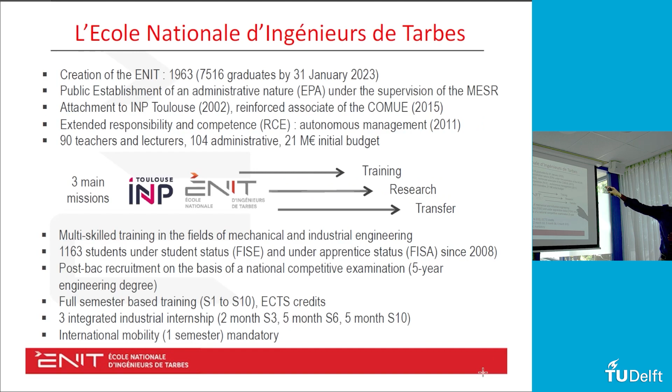And the research laboratory, as I said. The head is Bernard Archimède, who is a full professor in industrial engineering. I am the deputy director of this lab. The school was created in 1963, and the lab was created in 1989.

We have more than 130 members, with around 60 permanents. We have also around 60 PhDs, and the other staff is postdocs, technicians, engineers, and secretaries to support the research.

As I said, it's a multidisciplinary research with, I would say, half for mechanical material science and half for industrial engineering in the large sense. That means industrial engineering, computer, robotics, automation, PHM, etc. It's organized in 2 scientific departments. The first one for all things related to mechanics, and the second for all things related to systems.

In the Department of Mechanics, Material Science and Processes, you have 4 research groups, and we have 5 research groups in the Department of Systems, and we have what we call a transverse axis, which works on multidisciplinary topics in the lab.

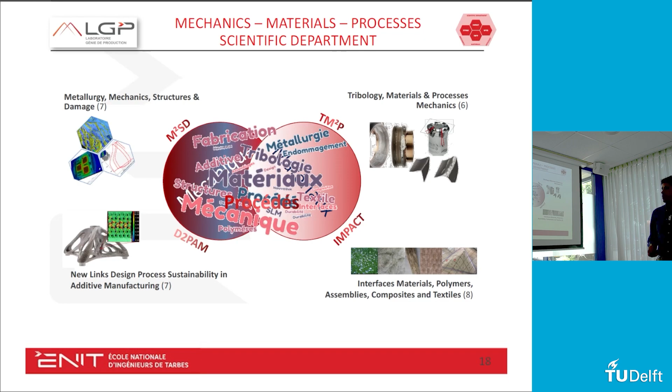We have new links, design processes, sustainability in additive manufacturing. It's mostly additive manufacturing. We have interfaces, materials, polymers, assemblies, composites, and textiles. We have tribology, material science and processes, mechanics. I don't know if you are accustomed with this, but again, if you would like to collaborate, we'll be pleased to put you in touch with our colleagues.

For the system department, we have 5 groups, as I said. We have PICS, which is planning, interoperability, and coordination of systems dynamics. We have ACE, which is efficiency of electrical energy conversion systems. We have Mavericks for automation and robotics, methodologies for the design and control of mechatronic and robotic systems for interaction.

We have another group which is ICE, Knowledge and Experience Engineering for the improvement of processes, systems and organizations. And we have the research group related to prognostics and risk safety management. The transverse axis works mainly on additive manufacturing, for all additive manufacturing processes, from material to systems. It tries to bring together colleagues from the 2 departments to work together.

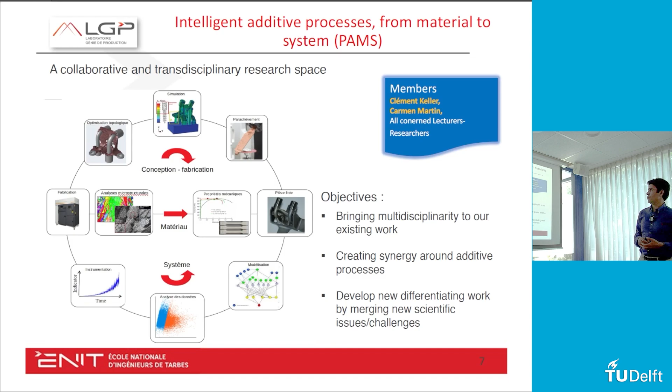These are the platforms we have for mechanical, for material, for industrial engineering, for robotics. If you are interested in the equipment we have, you can come and we can share them. Of course, we ask for some agreements before working on them. But we are really well equipped with recent equipment.

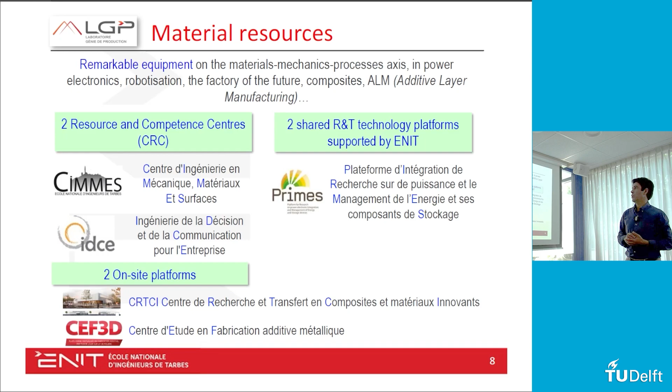So I finished just here to present you my lab, and now I will go to the presentation. Same for the presentation, I will not go to the details, but if you want to discuss, I will be pleased to do it with you. And of course, at the end of the presentation, don't hesitate to ask questions.

This is for prognostics and health management, mainly because I am working on this. But as I said, for other topics in our lab, we will be really pleased to welcome you. I will present you the workflow, some approaches, and what we have done until now in the group.

So, as you know, why we do this PHM is to try to anticipate failures, to predict failures, mainly, and then to try to optimize the maintenances. Mainly for us, it's condition-based maintenance and predictive maintenance. Okay? You have some statistics.

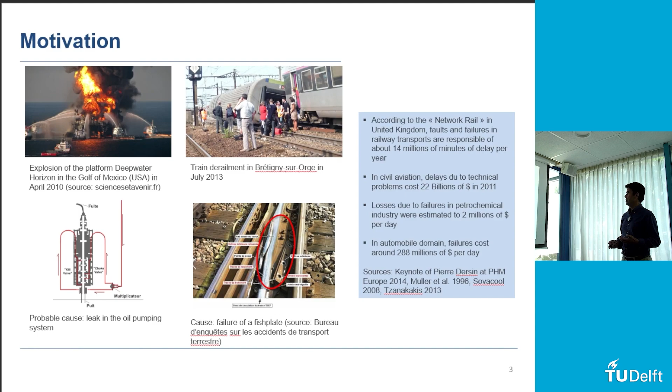I don't know if you have heard about this catastrophe, and there is a movie now from 2016, I think, something like that. And here, unfortunately, in Paris region, derailment of a train at the rush hour, and you have all statistics about the impact of degradations, failures on performances, on systems, and also costs. So we work in the group in PHM to try to anticipate these failures and try to reduce the costs.

You have many definitions of PHM. I give you here only three: one from a transfer center, one from a company, and one from pure research. If you look at these definitions, you will see that in PHM we work to use tools, methods, algorithms to monitor the system, to detect anomalies as soon as possible. This is very important. Diagnose the causes of the faults, and then predict what we call the remaining useful life. All this information, we use it to schedule optimally the maintenance actions.

The process of PHM, of course, this is just to show the main steps. But what I mean is that we don't have to work, for example, on health assessment to go to the decision. We can, from health assessment, go directly to decision. Okay? We don't necessarily work all these steps sequentially. From data processing, we can go to anomaly detection or decision, etc. But the main steps are here.

We have a system here. You can replace this by your aircraft, and then we should first have representative data. Representative data means not only healthy data, but healthy and faulty data. This is very important. And then we pre-process this data.

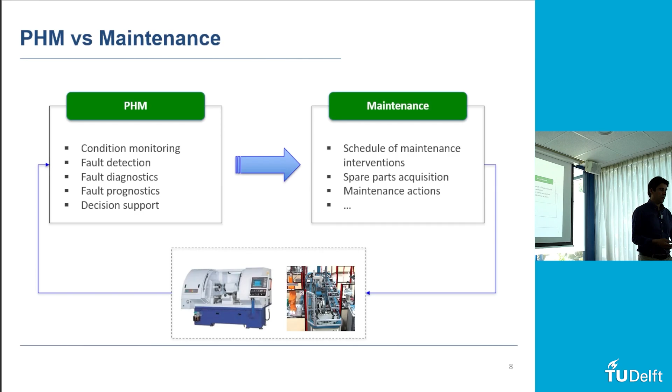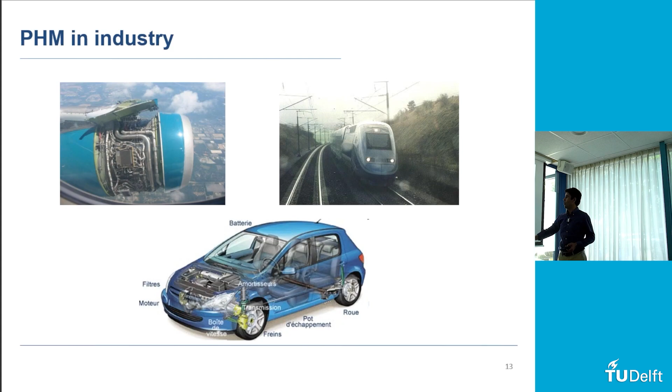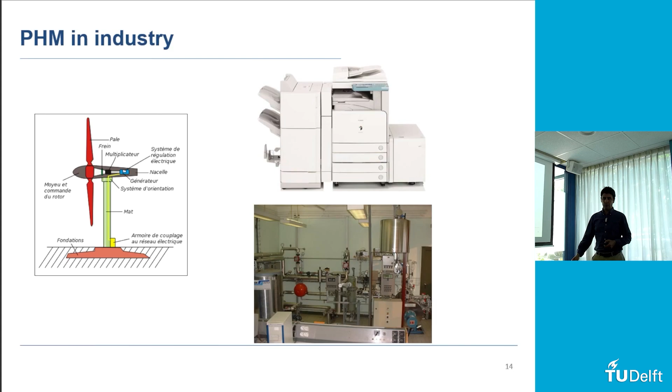The application of PHM, you know, you find it in aerospace, you find it in railway, automotive, you find it in wind turbines, in all equipment for printers, etc. You find it in manufacturing processes, and so on. Okay. This is, of course, not exhaustive. We don't have all companies here. Just to mention that for aerospace you have the main companies, the energy also, railway, etc. So

I didn't put KLM, sorry, but they are inside, of course. Okay, they are not looking, so you have to cut it after. Sorry, I'm laughing. Okay, it's not complete, of course. Huh?

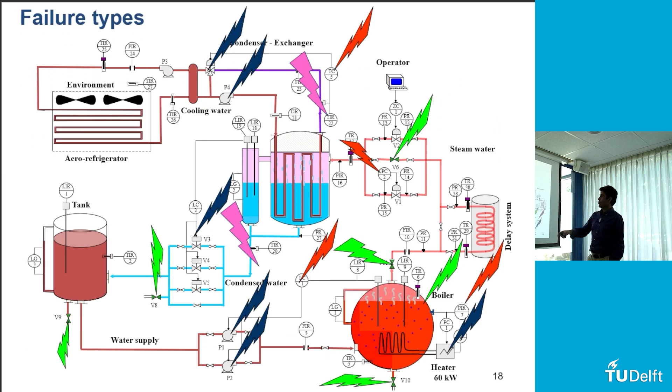Here, just to show you the main failure types we have on a system. When you have a system, we have what we call physical failures. That means leakages, blockages, etc. on a system. You may have what we call also controller failures. They are control algorithms, okay, the controllers. You may have also actuators. You may have, at the end, sensors.

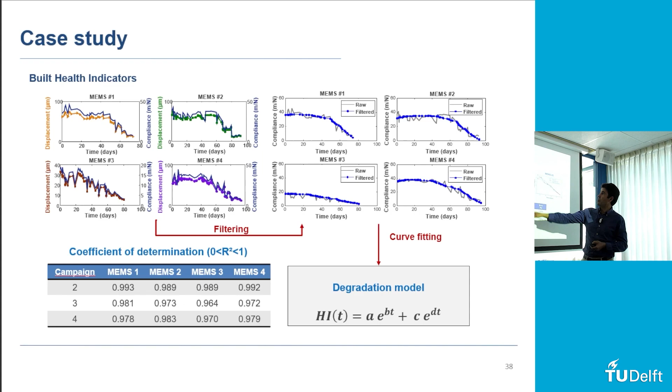We can calculate at each time the health indicator value. And then, because we have a threshold, we can estimate the remaining useful life of each MEMS. Of course, when you see here this blue line, we know it after each degradation. Because we are in a lab, for each MEMS we know. But when we predict, we don't put it. So we give only the data to the PhDs. They don't know this true value of RUL. They have only the data. And then they try to predict, you see, look at the predictions. They are quite good predictions.

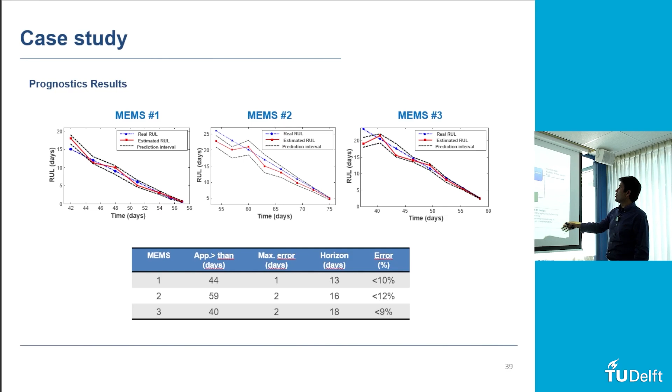And then all this we use, of course, to take decisions. We work in our group also, I didn't mention this, on how to use this information to make decisions. It's mainly optimization problems. And the decisions can be of two types. Operational, that means how to make maintenance interventions, how to change perhaps the set point, the control. We can work also on what we call fault tolerant control. I don't know if you have heard about this.

In aerospace, in aircraft, it's well used because the aircraft should be tolerant to faults. When you have a failure, they should continue operating. When you have one engine which is out of service, they continue with one. Okay, they are called fault tolerant systems. Control in the sense that when you have a fault, you try to manage the control to continue working even with the fault.

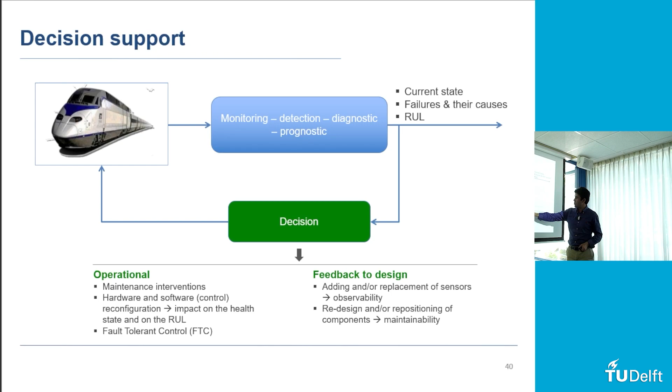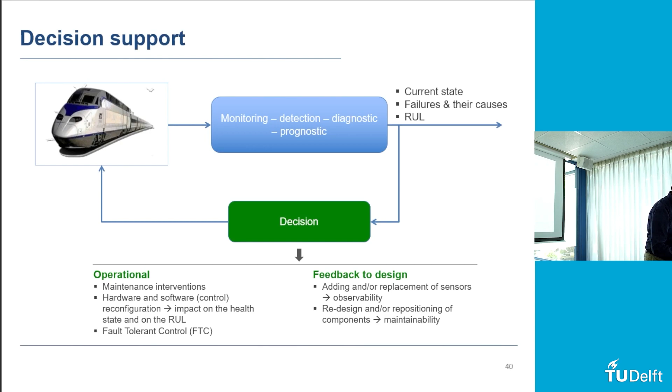Also the decision can be the feedback to the design. That means we should, for example, add sensors, try to place the sensors other ways because they don't detect correctly. We can also redesign the components so that they can be easy to maintain, what we call maintainability. We take less time to maintain, etc. We work on this. Okay? I can take 5 minutes to...

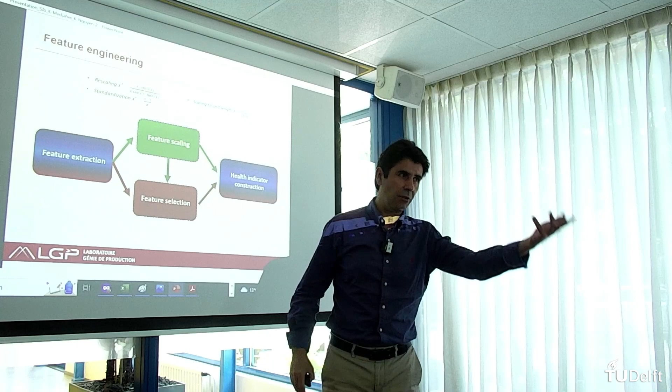Yeah. So here I will quickly speak about some steps, feature engineering, anomaly detection and diagnostics, and prognostics. Just some results. You have our papers, and of course we can continue by exchanging emails. You have, I guess, worked on this. When you have raw signals, after pre-processing, after all this preparation of data, we extract features. We can scale the features, we can select the features, we can build health indicators. They are for us different steps.

In the feature extraction domain, you have mainly three types of features: time domain features, frequency features, and time-frequency features. I don't know if you have worked on this. And you have, of course, each one for each specification, each application. If you'd like to go further, you can look at this paper. It's, of course, free. You can download it. Here, our first contribution on feature selection. We worked on it with Alstom.

Okay, there are some confidential issues I will not speak about in detail. Quickly speaking, we have a system for a train, TGV, and then we have some sensors, okay, temperature, vibration, and so on. And these are raw signals. Then we worked on a method based on a genetic algorithm to select the best features among the extracted ones. The best features only for detection and diagnostics, not for prognostics.

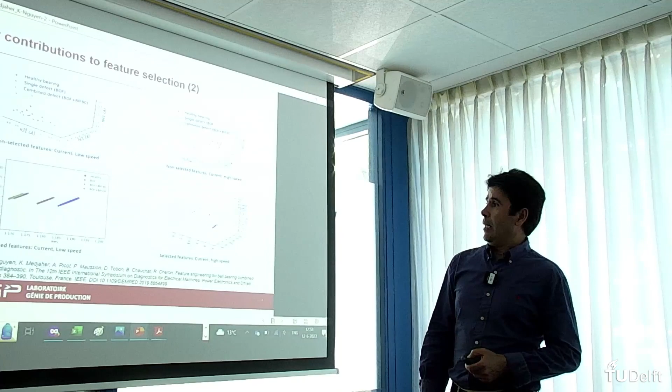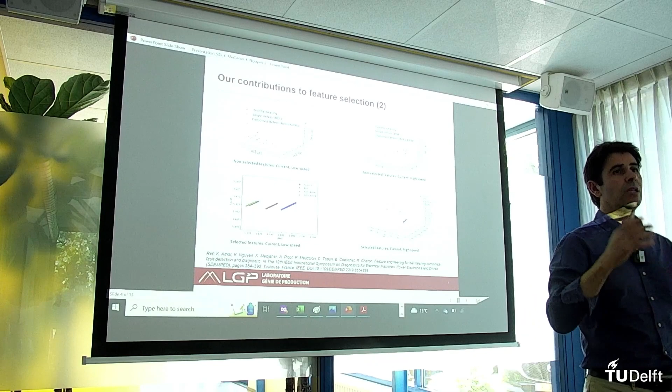Here you can see the results without selection and with selection. You see the separation here. Here you cannot separate the operating modes. You can turn the points, the graphs, in all directions, you cannot separate. And even by working with KPCA, with kernel methods, we cannot separate. But by using our algorithm, we can separate the modes.

Okay. Also, you can read it and then we can discuss. If you have questions, we can work there.

Sorry, this data will be available soon because just last week we had an acceptance of our journal paper where we describe many data sets, and we will share them. You will find the GitHub website to download them, like the data we have at NASA. But the advantage of this data is that they are really real data. For example, this one was an industrial platform, real data. We have worked on them. Okay, they will be for free.

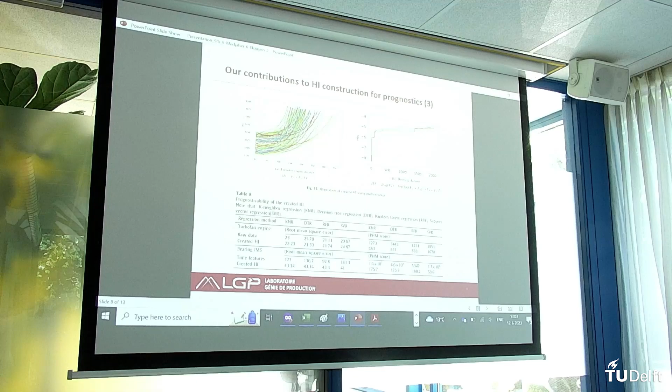This is for prognostics also. Before, it was for feature extraction and selection and health indicator construction. Now for diagnostics, you have this method. I don't know if it's clear. Otherwise, you can find it in this paper. The main idea is what? It is to combine both direct and indirect monitoring data.

What do we mean? We worked here on a robot used in machining, to produce mechanical parts. Usinage. You see, machining? Yeah. And in this robot, you have two kinds of sensors. You have sensors placed at the end, at the machining tool level, and you have sensors placed at the articulations of the robot, in the motors of the robot. Okay. So we have used both to do diagnostics.

What is the advantage of this? First, we use only the data from the sensors at the machining tool of the robot, because it's easy. To use those for the articulations, you have to go to the PLC of the robot, which is not accessible because you need the authorization of the manufacturer. Okay, we got it because we were allowed.